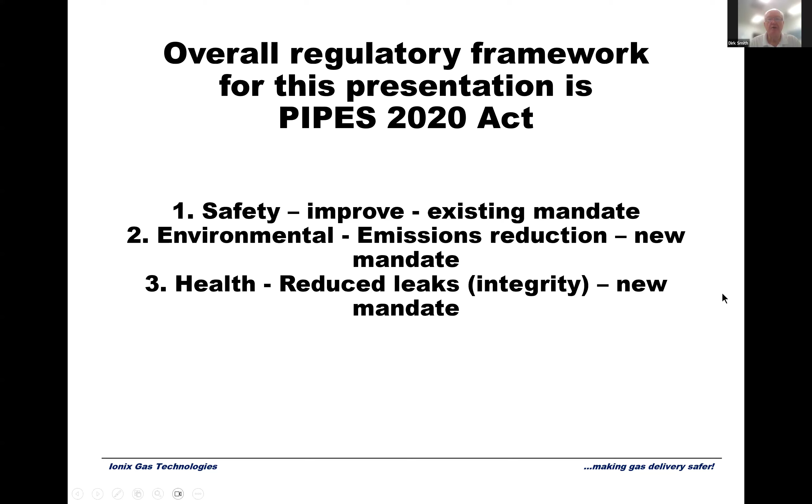It's important we keep in mind the regulatory framework of this presentation, that's the Pipes Act 2020. The LDAR rule was withdrawn from the Federal Register on January 20th after the inauguration of Donald Trump. However, that does not negate the Federal Pipes Act. In addition to improving safety, which is an existing mandate that PHMSA, the enforcement agency, has, it also said they must take into account environmental effects and health effects of methane emissions. That's going to be the basis of what we're going to be talking about, the overall framework.

The goal of this session is to gain a working understanding of static electricity in your PE gas pipe system. We're also going to do a digression about metal pipe. Then we're going to learn to recognize the four static threats that come about due to static electricity in your distribution systems. We're going to review available static suppression technologies, and we're going to suggest best practices for that.

Now it's important we all have the same understanding of the terminology. First, understand what static electricity is. Electricity is electricity. The difference between static and current electricity, like the electricity powering this laptop, is that current electricity flows through a material that is an electrical conductor, like copper, which easily allows the flow of electrons through it. However, if you took those same electrons and put them on a piece of polyethylene, they would not move. They'd be static, because the inherent nature of polyethylene pipe will not allow the movement of electrons on it. Therefore, you have to conduct the electricity away, because the material itself will not conduct it away.

So how is static electricity created? Generally it can be created many ways, but in our case it's due to friction, the passage of gas inside the pipe, the mechanical shearing action of gas passing through the pipe. When it does so, it physically scrapes off electrons, and these displaced electrons accumulate in random places inside your system. We don't know why they go to one place rather than another, why they're not evenly distributed. It just does. So the static starts to build up, and these orphaned electrons accumulate inside the pipe in certain areas.

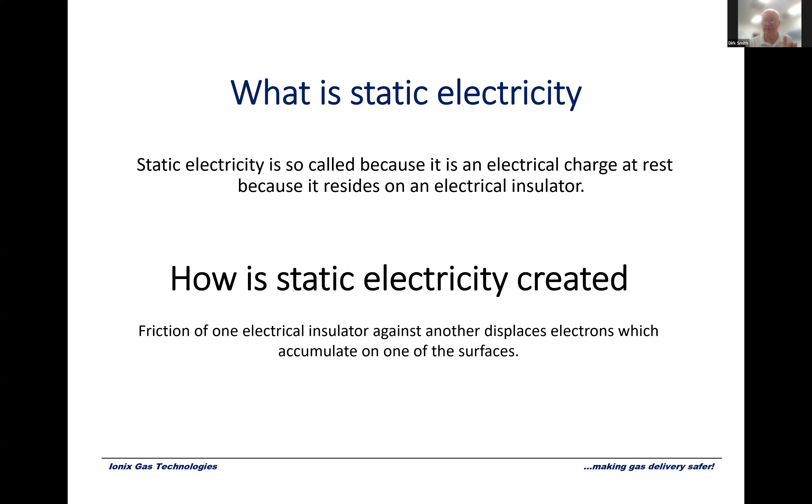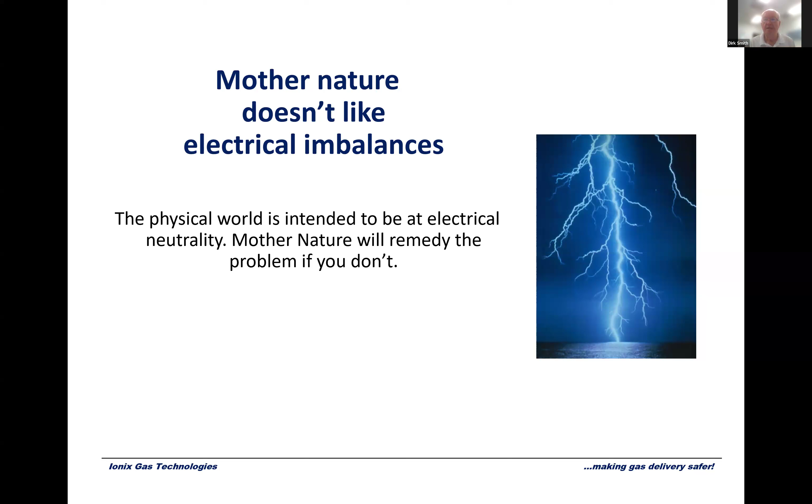Now, four basics of static electricity and polyethylene pipe. This was research done by the Gas Research Institute, paid for by the industry. And this is the most important thing you need to take away today. If you have a priority of everything I wanted you to learn today, this would be number one. The root cause of all your static issues is because static starts inside the pipe. It's the movement of gas, it's the friction in there. That's the engine, that's what's making the static.

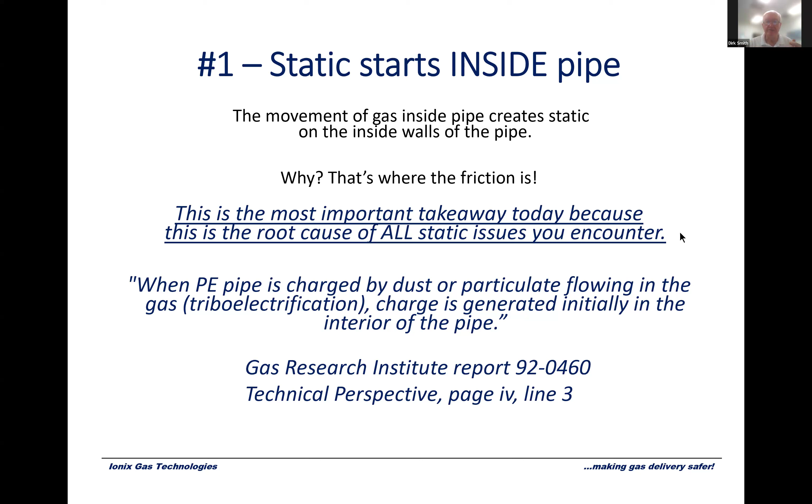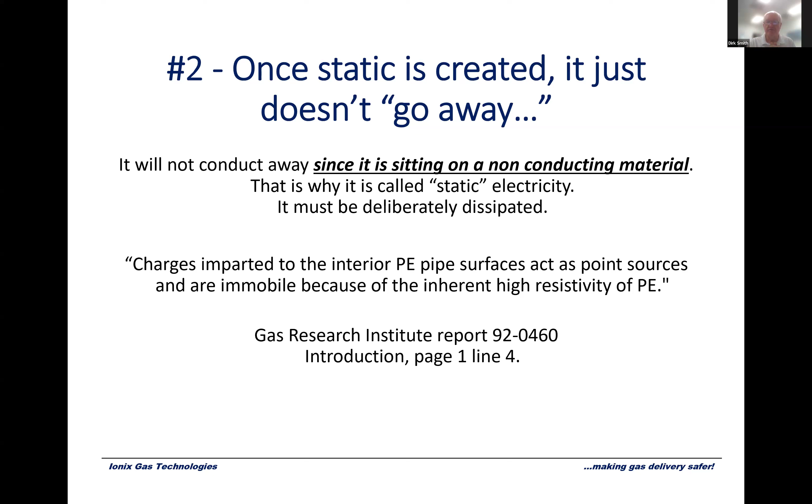Understand it will flow out, it'll manifest itself in different ways, but it all starts here. And here's a citation from the Gas Research Institute on what they found. The second thing is that because those electrons are sitting on a material that is not an electrical conductor, that is polyethylene, those charges just sit there. They can't conduct away, they're just going to sit there until something causes them to go away. And there's a citation from the Gas Research Institute.

Now the third thing is not intuitively obvious. I could explain it, but it would take too much time. You really don't have to understand why it happens, you just need to know it does happen. And that is, when the static charge is built up on the inside of the pipe, it induces a charge on the outside of the pipe. That's why you do the static discharge procedure on the outside of your pipe.

And the fourth thing is that static's going to discharge. If these charges accumulate, they will by nature seek to dissipate themselves, to neutralize themselves by arcing to ground. So it's important that you understand that problem is just not going to go away.

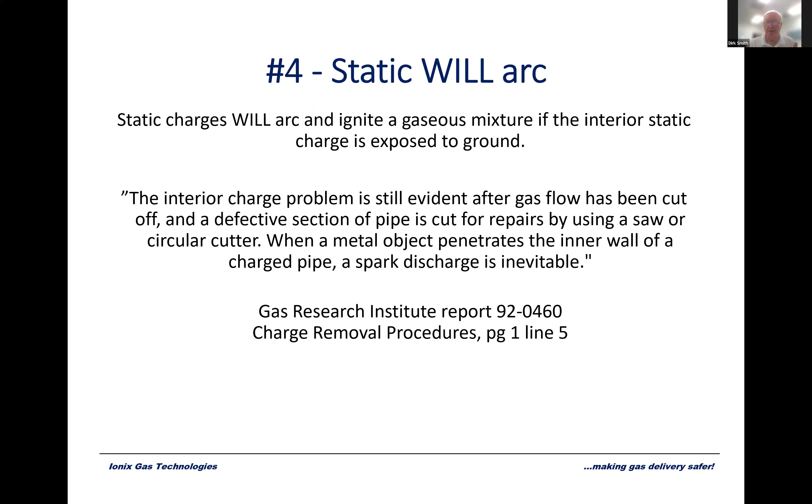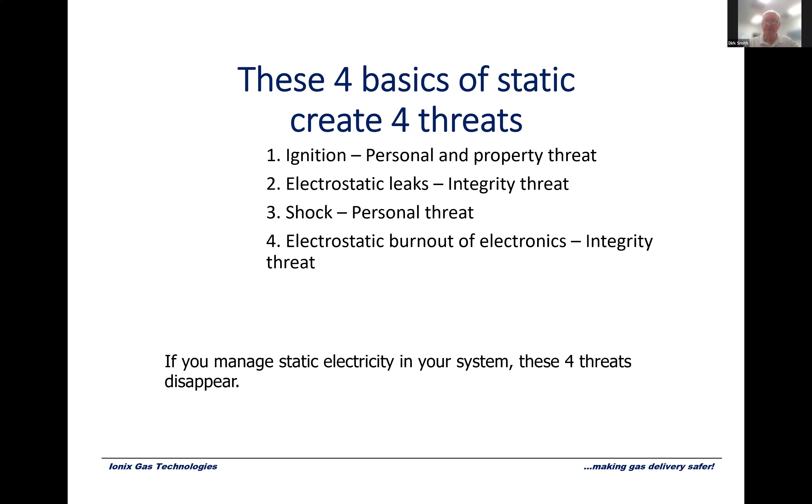Now, from these four basics flow four threats. Ignition, which is a personal injury and a property threat. Electrostatic leaks, it's an integrity issue. Static puts holes in pipe, it shocks people, and it burns out electronics, and that's an integrity issue. If you manage the static in your system, all these problems go away.

Now, this is a bulletin issued by OSHA about static electricity and buildup in pipe. It was issued, I think, around 1980. It was directed to make sure that everybody is aware, that OSHA is aware, that static builds up in polyethylene pipe, because they had an incident of ignition in Dallas, Texas.

In 1973, in the AGA plastic pipe material book, it advised operators to do static suppression before working on polyethylene pipe. Now, the reason I bring these two up to you is I got a call one time from a gas company, fairly large one, and they said, please don't send us anything more about static electricity in systems, we don't want to know about it. And I'll tell you, I was stunned.

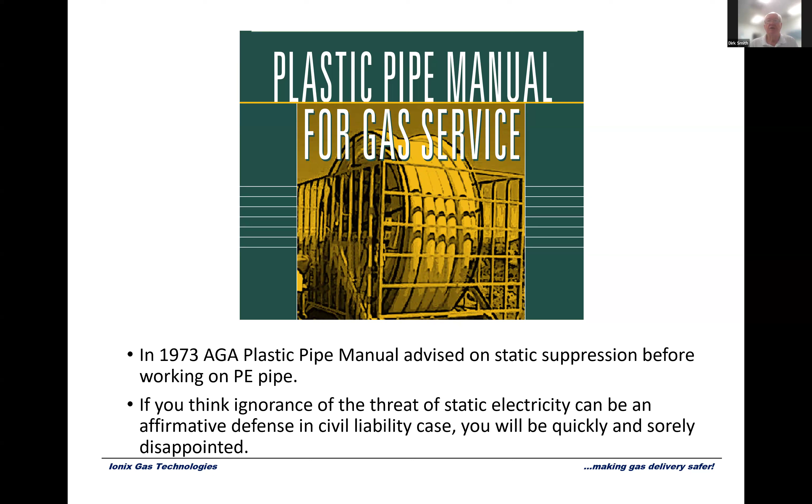Basically, they were saying, if we don't know, if we're ignorant of the problem, then we won't be liable. But the plastic pipe manual, OSHA has said there's a problem, AGA says there's a problem. If you think declaring ignorance as an affirmative defense in a civil liability case will work, not only will that be dismissed post haste, but you'd even be accused of negligence by not knowing some of the basics that everybody else in the industry is aware of. So you can't put your head in the sand about this issue. It will come back to bite you if you do that.

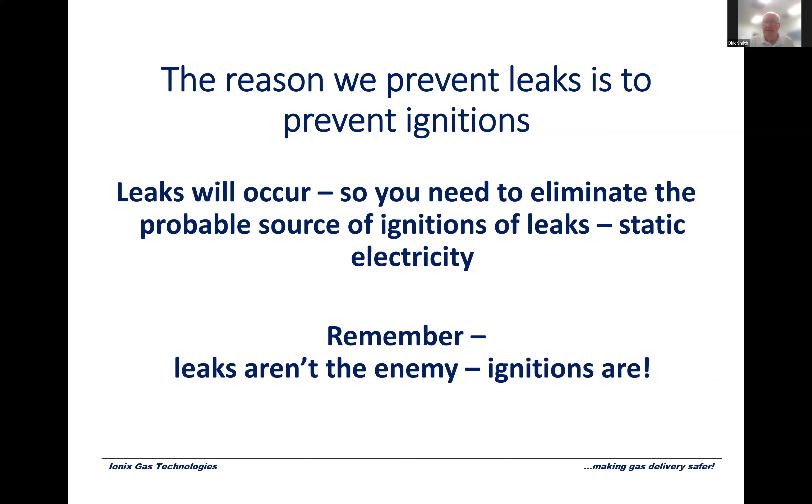Okay, of the four threats, we're going to talk about the first one, and that is the ignitions of leaking gas. Now, why do we prevent leaks? Everybody wants leak detection, everybody wants to make sure we don't have any leaks. PHMSA wants no leaks. What's the reason they don't want leaks? The reason they don't want leaks is because the leaks ignite, and your main source, your probable source of ignitions of leaks, is static electricity. So remember, your leaks aren't the enemy, ignitions are. If you find and deal with the primary ignition source of leaks, leaks don't become nearly as threatening as they used to be.

This is a pie chart of the claims expense paid by the Associated Electric and Gas Insurance Services, or AEGIS. AEGIS insures probably 90% of the gas companies in the United States, in addition to insuring the electric.

And this is a pie chart of the claims. I think it was 2023, this was given to me. And this shows where all the money was paid for claims by category by AEGIS in the year 2023.

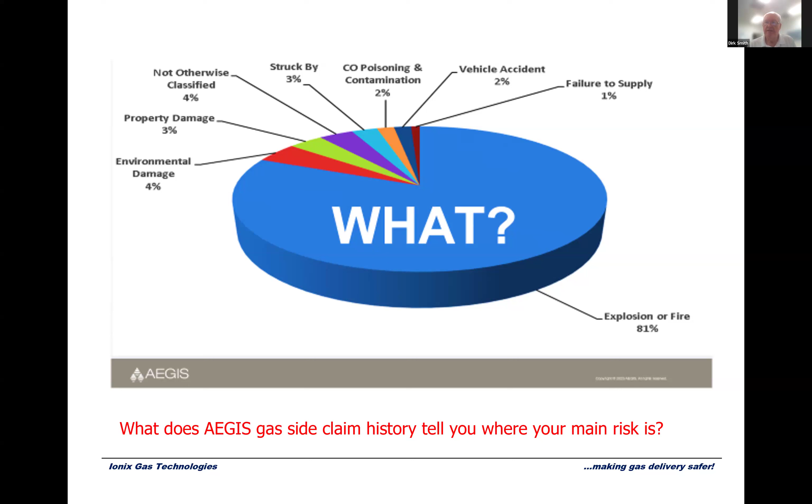If you take a look at it, they've got environmental damage, property damage, other not otherwise classed, struck, CO poisoning, accident, failure to supply. But all those other categories combined do not equal what they paid out in fires and explosions. It pays to prevent ignitions.

This is a video that was sent to me. It was a recording of a TV station's evening news when it was broadcast. It's been about 25 years now. It was recorded using a VCR over the television, that's how long ago it was. But it's one of those rare instances where an ignition is caught on tape.

What happens is the television station listens to the police radio. They heard there was a leaking gas line. They send a crew out to film it, and they listen to the police radio, and they just send people out, and they don't know. They collect it all up at the end of the day and decide what they're going to air. And this is what they aired on that day.

A natural gas explosion rocked an Oklahoma City neighborhood just before noon today. Workers were trying to repair a ruptured line at Northwest 131st and MacArthur when the gas ignited. Newsline 9's Heidi Browning joins us live from that neighborhood. Heidi? Well, Kelly, there's a bit of a mess out here in the neighborhood. You can see behind me what's left of a fence, charred remnants of the posts, and quite a lot of digging that's been done to make repairs to those lines. But people coming home this evening will find a much calmer scene than what many people saw this morning. It started as a fairly routine repair job. ONG workers were trying to get the gas turned off after a 2-inch medium pressure line was accidentally cut. Suddenly, the gas exploded, sending huge flames into the air. 2 workers received minor burns. ONG officials say there's preliminary speculation that static electricity in the plastic pipe somehow caused the explosion. It took about 30 minutes to control the fire and get the gas turned off.

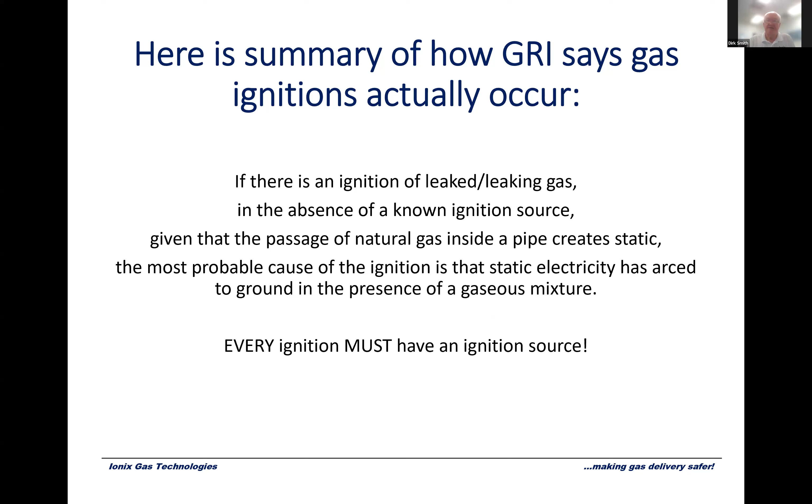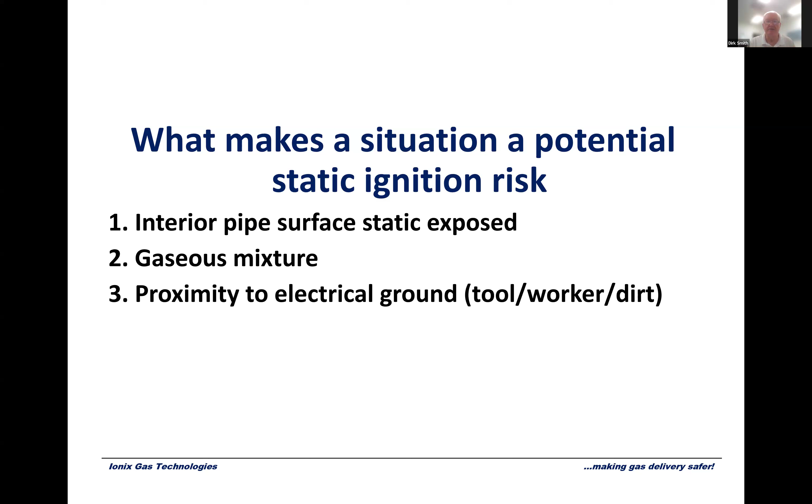In this, we're going to look at some of these field operations and what makes them dangerous specifically, because I want you to see where the danger is in these operations. You're going to know that these operations are dangerous, but where's the static in these operations that causes it to be dangerous? That's what I want you to understand. So remember, in any situation with a potential static ignition risk, you have to have interior surface static exposed, gaseous mixture, and proximity to ground, electrical ground.

So here are the 5 most dangerous operations. And when your crew goes out in the morning, like this crew does, I want you to be ready and explain to them what these dangerous operations are. Remember, there's going to be static that starts on the interior of the pipe and works its way out - the root cause is in the interior. Now, this is the most dangerous one, and this is what you saw in the ONG video I showed you: there was third-party damage.

Now, what happens is we know static is generated inside the pipe, but it's not uniform. I can tell you with 100% certainty there's static in your system. Some people may have more static than others, and it's not evenly distributed.

Now, in this illustration here, you see these red patches. They indicate hotspots of static that randomly appear. Here's this dig in on this pipe, kind of what you see in that ONG video. As the gas comes flowing out, the broken edges create a lot of turbulence, and the static builds up on the inside edges of the pipe.

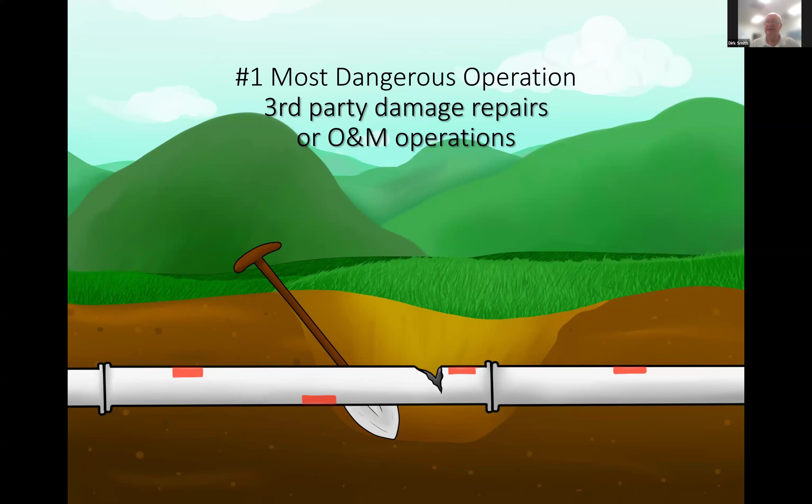The reason this pipe didn't ignite right away is because it didn't hit a hot spot. But with the gas blowing out of the pipe over time, the static built up and up and up. It kept growing, finally got high enough to arc to ground in the presence of the gaseous mixture, and that's what ignited it on camera.

Now, it's the same thing if you have a purge pipe. We're purging less and less, I get it, but you're going to have the same thing, and the static is on the inside edges as the gas flows out. This is the same if you have an overpressure vent or a relief vent. The same thing's going to happen.

Now, this is a metal purge pipe, and you have it grounded. You're assuming there's a connection to ground, but you can't assume that. You have no way of knowing. If you have coatings or grease buildup, static can build up on those electrically isolated patches. So you should always look to dissipate the static on the inside edge of that purge pipe, and the connection inside -- it's not going to be a smooth, clean connection between your metal purge pipe and the plastic pipe.

Be careful when you remove the metal purge pipe. The connection there will have static on the inside edges also.

The third most dangerous is cutting into a squeezed off plastic pipe. What happens is, downstream from a squeeze off, when you start the squeeze off process, the gas starts to accelerate to get through the narrowed opening. It's called the Venturi effect, well documented. The increased velocity creates increased friction downstream, which causes increased static electric charges, very high charges. So you have to be extremely careful when you cut into this pipe downstream.

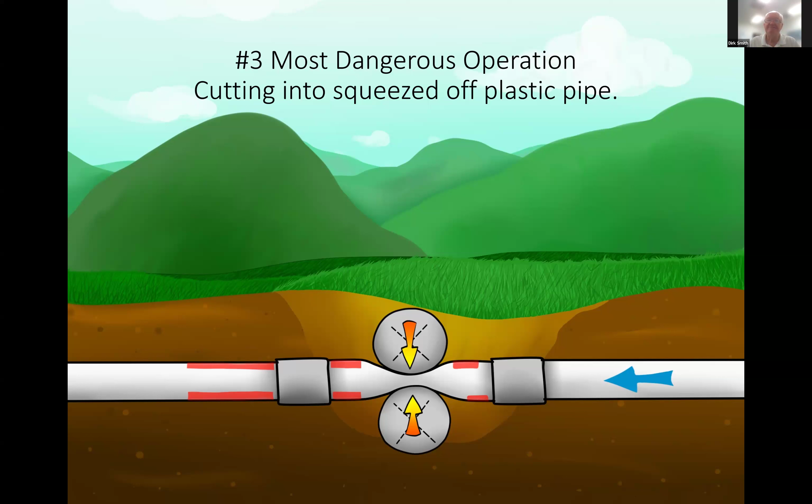So whenever you have a decrease or increase in the diameter of the pipe, whether it's a squeeze off or a valve, be very careful cutting into it downstream.

Well, when you have a topical anti-stat, you just spray it in there. Once you fuse the tap, you spray it in there, and that anti-stat works down there to dissipate any charge. But when you have a hot tap, you've got to be careful -- you don't know if you're drilling into a hot spot or not.

And finally, whenever you cut into a pipe that's been previously under pressure, removed from service, cut in or opened, or you're reaching into it, you have to be aware that it could be a static hotspot inside there. I remember a Western operator telling me a story about how they had a main line and a stub line coming off it.

They were going to extend the stub line, so they shut the main line down, took it out of service. The crew went over there, took a saw, started to cut through the plastic pipe, and boom -- both of them were thrown out of the excavation and taken to the emergency room. Big bang. Well, it wasn't an explosion, it was an electrical shock.

So the utility was embarrassed. They hadn't called for a locate, even though they tell everybody to call it. They didn't call for a locate. So they called the gas company, and the gas company says, we don't have any lines out there. And what had happened, they cut into a hotspot on that stub line.

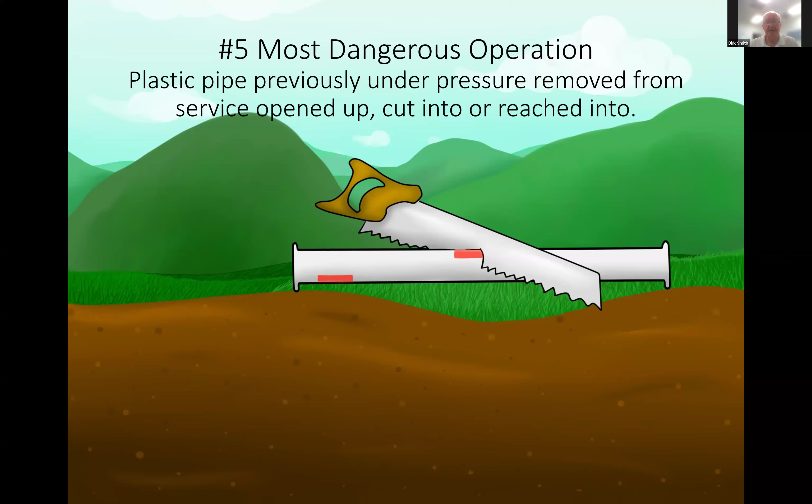This is an incident we're going to talk about now, and this is time we have an adult conversation.

This occurred on November 26, 2014, Memphis Light Gas and Water. And the OSHA report reads as follows: at 10:30 a.m. on November 26, 2014, 5 employees were caught in an explosion due to a natural gas leak. Static electricity ignited the gas leak, and 1 employee was killed and 4 others were burned.

Now, first of all, we're going to look at this a little bit further, but I want you to understand that OSHA did not find Memphis Light Gas and Water at fault. They had procedures, they had training in place that was designed to prevent this. So it's important that you have these procedures and do training on this, you audit it, make sure it's followed, and you will then have an affirmative defense if something goes wrong.

This is a video grab of that ignition. Now, I'm going to tell you what I have anecdotally heard. This is being recorded, it's going to be on the internet. I have not verified this. So it has been alleged that the workers in the trench had squeezed off the poly pipe and cut the pipe.

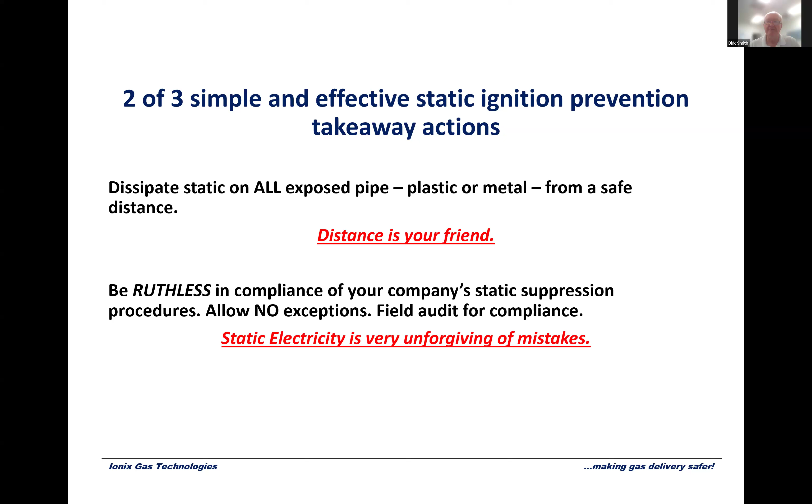2 of 3 simple and effective static ignition prevention takeaways right now. Dissipate static on all exposed pipe, plastic or metal, from a safe distance. Distance is your friend. Be ruthless in compliance of your company's static suppression procedures. Managers and workers, don't allow any exception, and field audit for compliance. Static electricity is very unforgiving of mistakes.

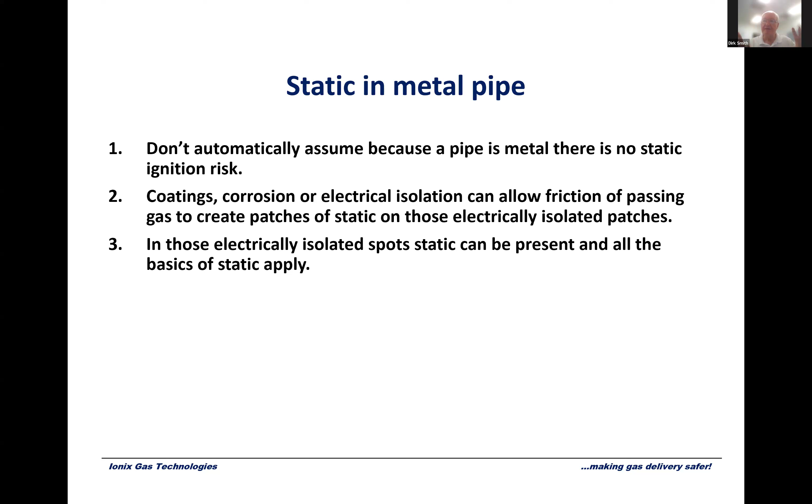Now, we're going to talk about static in metal pipe for a minute, because we're primarily talking about poly, since static and poly pipe is a far greater problem by the nature of polyethylene. But people think that you can't have static on metal pipe, and that is not true. The reason is because if there's any coatings—and everything's coated—or there's oil or grease, electrical insulating materials, or some kind of debris, that same friction that shears off electrons can deposit and accumulate those sheared off electrons on surfaces that are electrically isolated, and they can build up. So you need to be aware that you can have static on metal pipe simply because of all the coatings and all the stuff that's inside the pipe downstream.

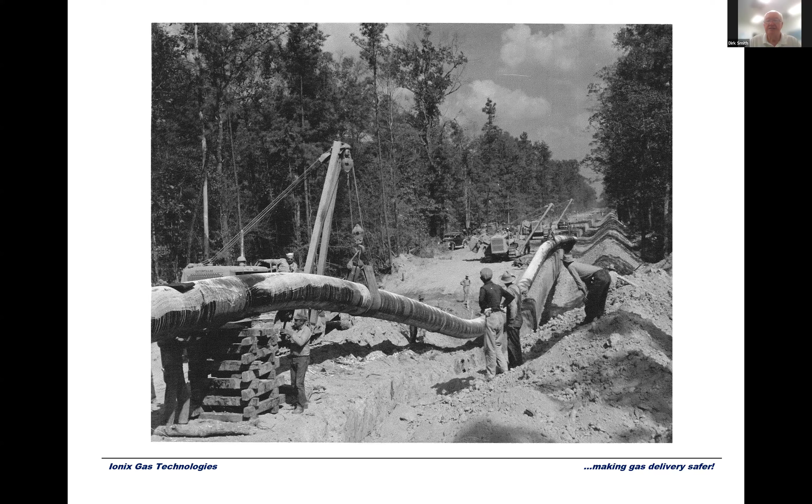Now, we're going to talk about a nice modern pipeline like this one you're seeing installed right here. And that is this Tennessee gas pipeline in Hanoverton, Ohio, on February 10, 2011.

It's a metal pipe, right? Static can't be generated. Oh, yes it can. It doesn't mean that every natural gas metal pipeline or every poly pipeline that leaks is going to ignite. However, it has the potential to do that. You must understand that. What's happened here is this pipe has failed.

The friction of the gas going out the break—it's coated. The static starts to build up on the coated areas. It gets higher and higher the longer this gas flows out. It finally gets high enough to arc to ground and ignites a gaseous mixture, and you have the picture that we have.

Now, one more thing about metal pipe. OSHA has reported 2 fatalities from explosions during the launching and retrieving of pigs.

Downstream guys, you're not doing this too much, but upstream, they pig the lines every day. If you are doing that, you must be aware that when you have a launcher or retriever, you have the three ingredients for an ignition: gaseous mixture, exposure to ground, and personnel nearby.

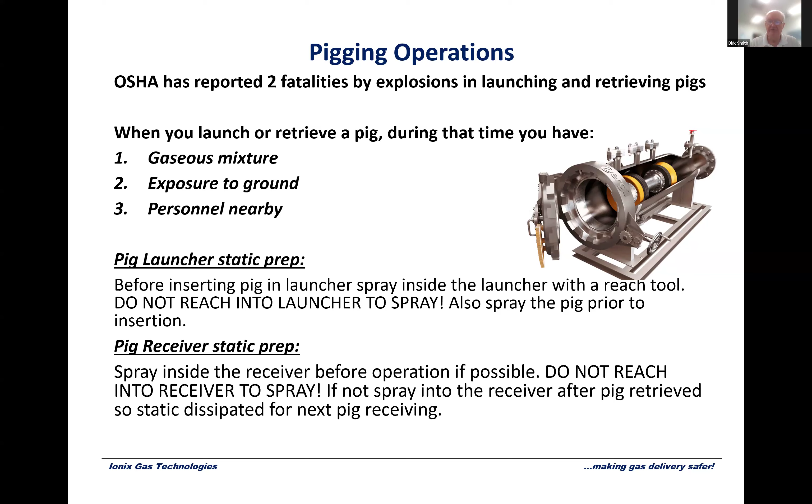Whenever you get ready to launch or retrieve a pig, you ought to spray an anti-stat inside the launcher or retriever before you begin the operation, so that when the pig goes in, the static is dissipated. When you open it up, the static has been dissipated, and when you retrieve it and open it up, same thing. You have made an effort to dissipate the static charge.

Now we're going to talk about the integrity issue that static causes in polyethylene systems, and that's it creates electrostatic pinhole leaks. Now we're all concerned about good technology for leaks, so I'm going to show you the newest advancement in LDAR technology for your consideration.

What happens is workers go out and see these little fizzy leaks. They get a leak call at a house with a poly service, go out there, see brown grass, dig it up, and see just a little fizzy leak. And they'll say it's just bad pipe, just a random thing. No, no.

It has been shown in the last 20 years that these leaks are caused by static electricity. They will be in one of two places: you'll find them running in the flat areas of the pipe where it's arced through the pipe wall, or you'll see it arc through a bead.

In a fusion bead, if you have one in a service line—chances are you don't, but if you might—the bead protrudes inside the pipe. The force of the gas hits that bead, the friction is higher, it builds up a charge, and arcs through the bead. You might get a leak there.

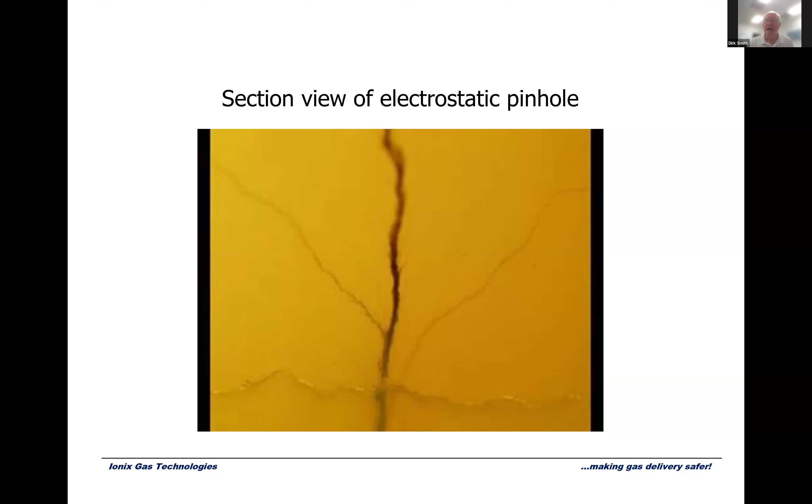They were straight lines, you know, there weren't any filigreed stuff like this. This is showing you that it is an electrostatic discharge that's causing these holes, not a manufacturing defect.

Now, GRI says that these holes can be created in the normal transport of gas. We don't know why certain areas have a problem. I can tell you there is a problem in Illinois, Indiana, Kentucky, Ohio, Western Pennsylvania, West Virginia, Virginia. Why there and not in other places? I don't know if it's because people haven't recognized what causes these holes. They're small holes, so they just don't bother with them.

But if you have a pinhole leak in your system, that demonstrates you have static electricity in your system. If you have a half-inch MD poly pipe service line, because of the dielectric constant of polyethylene, I can tell you exactly what voltage is necessary to arc through that pipe wall. It's about 42,000 volts. So if you have a half-inch poly line and a pinhole leak in that line, you had 42,000 volts of static inside that pipe that discharged to the wall of the pipe.

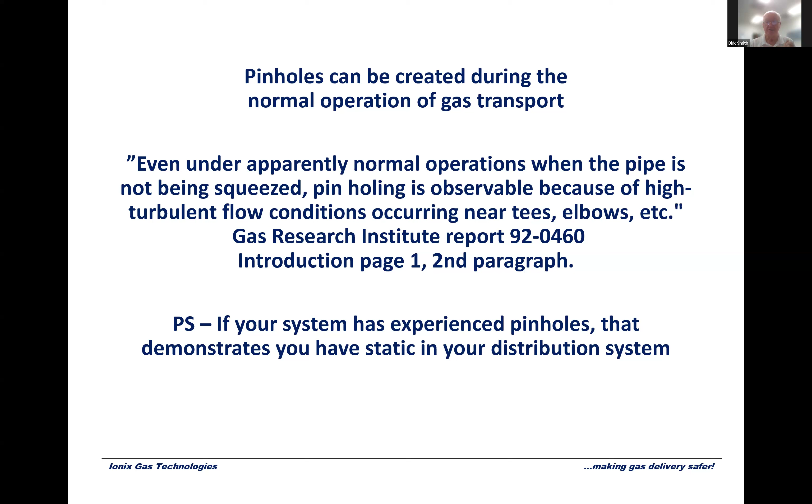Of course, the easiest way you find them is all of a sudden you get a leak call at the house. I smell gas. You go out there, and all of a sudden you see these little dots of brown grass going up to the meter. It's a poly line. It's an electrostatic pinhole leak.

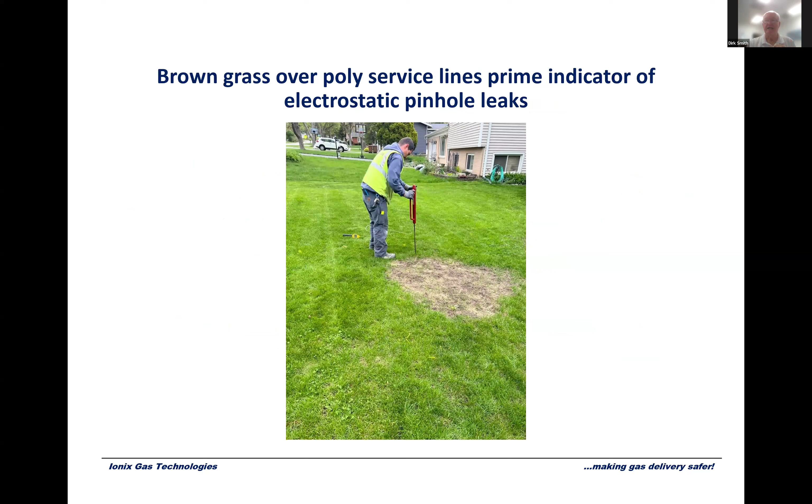So pinholes always occur first in service lines because they're the smallest diameter pipe wall. Therefore, it takes the lowest amount of voltage to arc through it.

However, I'll tell you a true story. Up in the upstream market, it's just the reverse of what you guys do in the downstream market. In the downstream market, you take gas at 8 inches, reduce it down, distribute it to 4 inches, then do whatever you want. But you go from a big pipe down to a little one. In the upstream gas production and gathering market, it's exactly the opposite. They gather at wells at 6-inch lines, and they start to accumulate it until they take it to the gas processing plant. I got a call from a gatherer, and he had a 20-inch poly line, a gathering line, and he had a pinhole leak in it.

One, imagine the cost to fix that. But two, can you imagine how thick the wall of that pipe was and what the voltage had to be to put a hole in a 20-inch poly line?

So you're going to find these pinhole leaks are going to show up with leak calls in residences, with grass in your service lines. You're going to find multiples. It's rare that there's only one. If you got one, you got more than one. And the problem is, if they get close together, this gas pools to an unsafe concentration. And under 192.1007, this is a known DIMP risk, and you're required to address and mitigate this.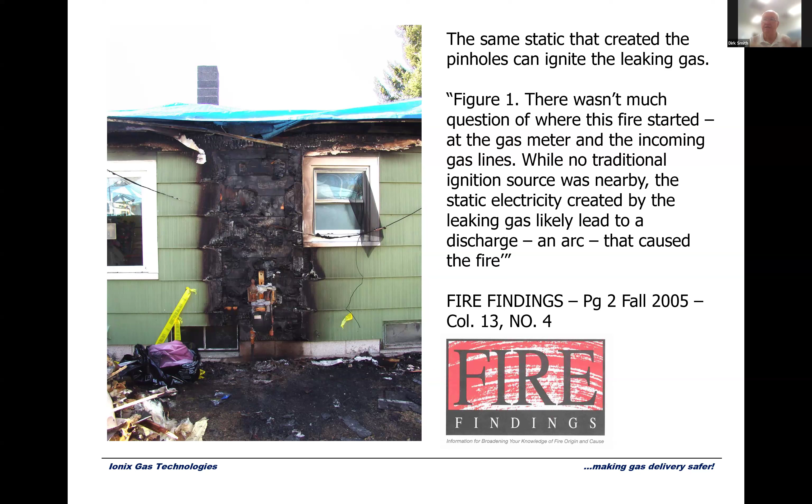You got to have an ignition source. Where's it coming from? That's why when you get these pinholes at your service lines, this is the possibility you can have. My first customer, when we originally started our system to get rid of these pinhole leaks, our first customer called us specifically for this reason. He was getting pinhole leaks of service, and he said, I'm going to burn somebody's house down. I can't do this.

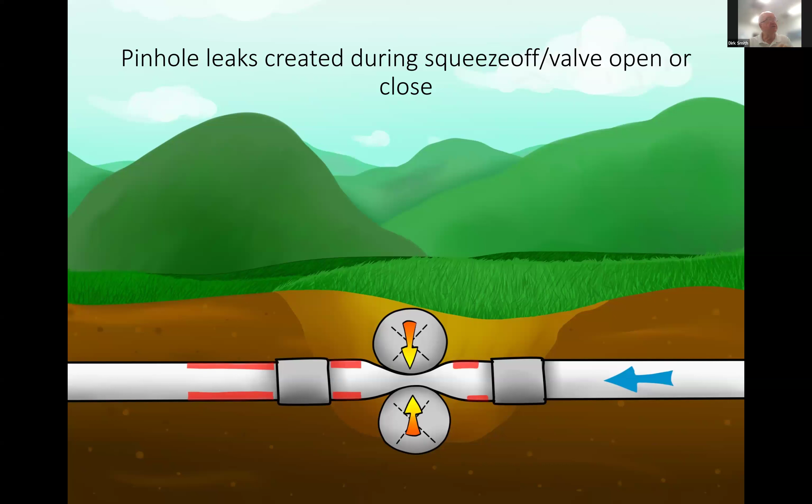Now, also, you can get pinhole leaks downstream after squeeze off, and you can also get it downstream from poly valve opening and closing. So it's important to keep that in mind. Whenever you open and close a valve, whenever you do squeeze off, you need to soap those downstream pipes to make sure that you haven't created a leak.

Again, you have to be concerned when you have a squeeze off valve opened or closed, the same thing can happen. I have not heard of any reported fatalities from this, but a friend of mine, Steve Jocelyn, who was with Connecticut Natural for many years and is now with PAL Controls, told me when he was in Connecticut they had a guy where the static charge arced from the pipe to him, went through him and exited out his foot. They had to use a defibrillator on his heart, and he also lost his big toe, burned by the static electric charge exiting his big toe. So although there's no fatalities, you've got to take this serious.

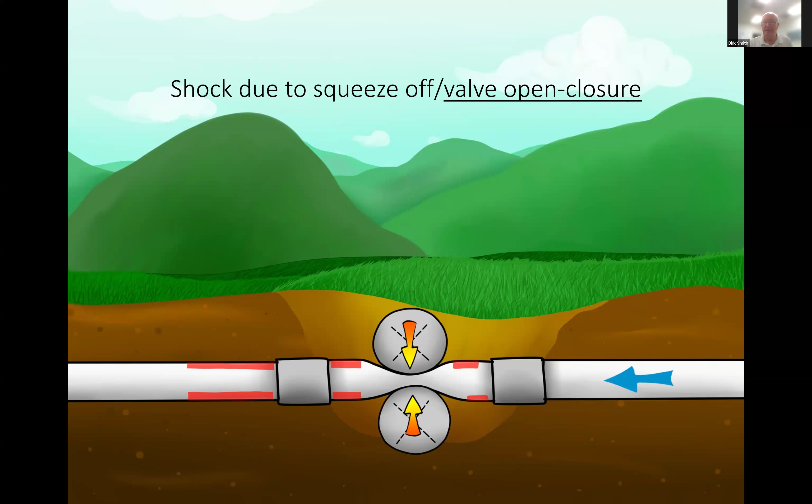It can happen, just like when those guys cut through that pipe and hit a hot charge in a hot spot inside that stub line, and off they went to the emergency room.

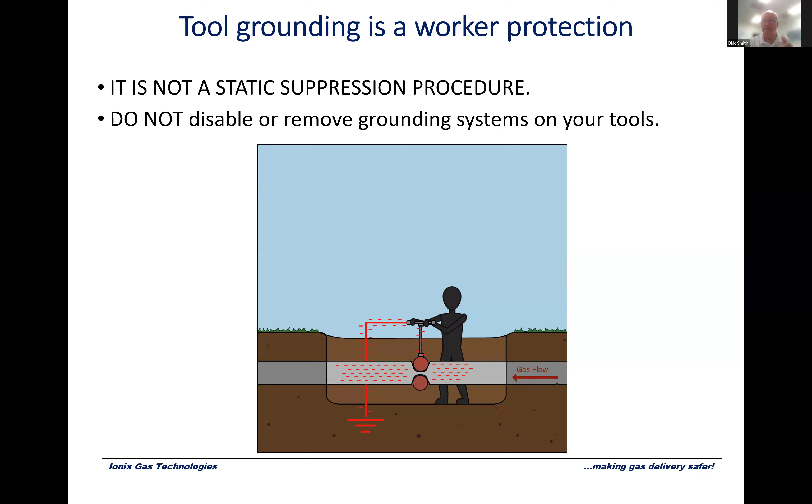Now, this is why tool grounding is important, but you must remember it is designed to protect the worker from getting shocked. It does nothing to dissipate the static charge on the pipe. Remember, the poly pipe is non-conductive, so if you ground that tool, only the charge that's in contact with the tool gets grounded. Grounding the tool does not get rid of the static on the outside of the pipe in the surrounding area. It's important for you to remember that. It's important to ground the tool, but also important to remember it doesn't dissipate static on the pipe. And again, remember when cutting into a pipe to be aware you could hit a hot spot and get a shock.

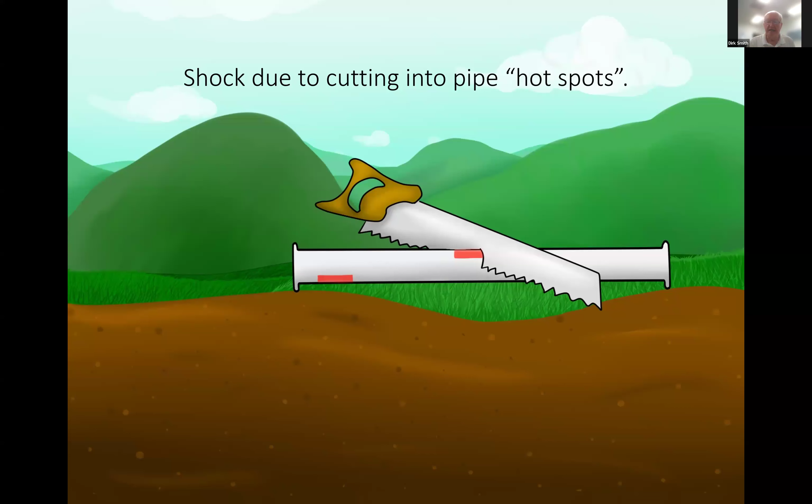Also, when you have high velocity gas passage, like in purging. Real quickly, I want to mention one more thing we've seen. It's something you probably will not come into contact with, but in case you do, now you'll know and be able to recognize it. Static electric charges can arc and burn out the low voltage electronics hanging on your system, whether it be a meter, SCADA devices, anything like that.

I got a call a while back from the Kansas Corporation Commission. They regulate and are in charge of pipeline safety in Kansas, and this is what happened. They needed to locate a line for repair, so they hooked up the locating transmitter. They found the location, dug it out, squeezed off the line, and all of a sudden the locating transmitter burned up. They said, well, we think it was the batteries in the locating transmitter that caused it to burn up.

Those are 6-volt batteries. They're not going to burn anything up, that's the reason they use low-volt batteries. What happened? Here's what I think is the most logical explanation. They squeezed off the pipe. There was a static buildup inside that squeezed off pipe downstream. It arced to the tracer wire, back up the tracer wire, and into the 6-volt locating transmitter, and fried it.

So if you're finding areas where meters seem to get burned out, or some kind of electronic equipment gets burned out and there's no recorded lightning strikes, it's probably static electricity in your system. Okay, now we're going to talk about mitigation technologies.

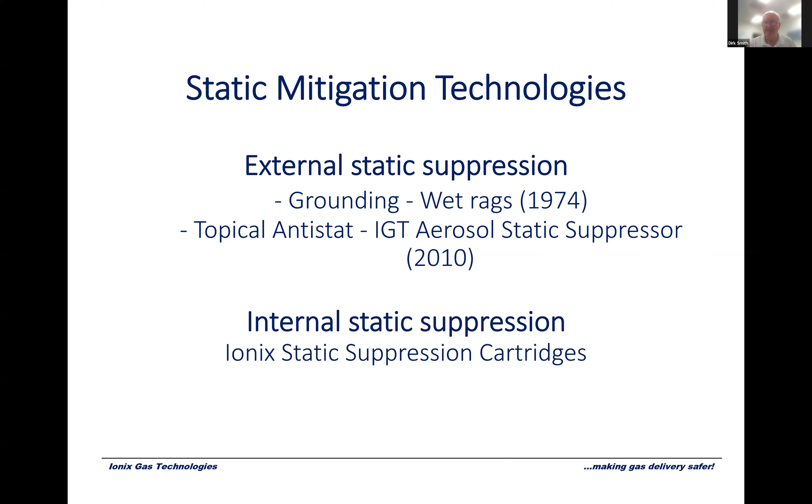Now, external static suppression is strictly a grounding mechanism. That's all it does. You wrap it up and you sit there and you keep it wet. The water, the soapy water and the pollutants in it, when you put it on the pipe, whatever area that rag touches, hopefully the charge is conducted through the water the rag is holding and conducts it down to ground, as long as there is a good ground.

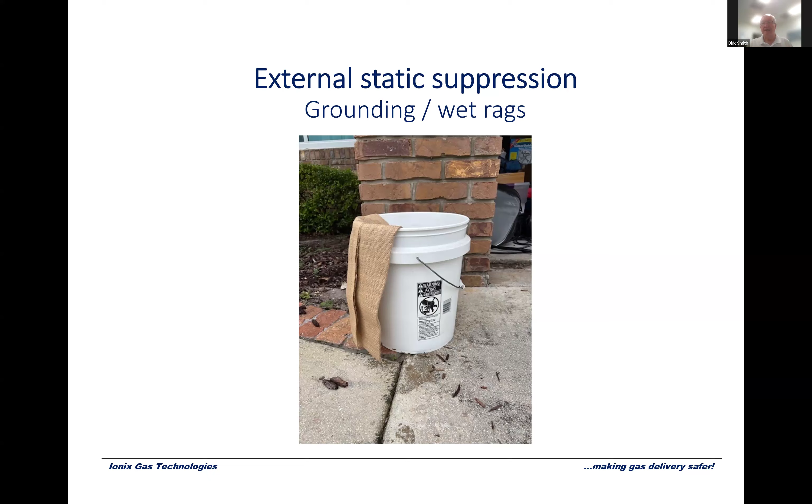Now, the problem with this technology is, one, the purpose of static elimination is to make sure an ignition doesn't occur when a worker's nearby. Yet with soapy rags, you have to send that guy down into the excavation before you've dissipated the static in order to dissipate the static. You don't want to do that.

The second thing is you can't confirm that you've got a good electrical connection that's grounding the charge. You assume it is, you assume it's wet enough, you assume everything, but you don't know, you can't confirm it. The third thing, it's not suitable for a lot of operations, like hot tap. Burlap bags, you can't put them down in a hot tap. And then finally, it's only as effective as it's properly applied and kept wet.

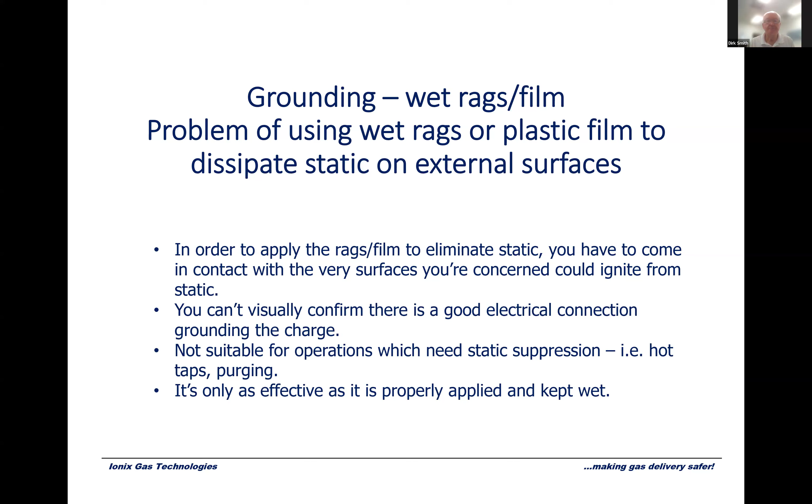Topical anti-stat, what happens is it dissipates static immediately on contact with any surface. It could be a tool, anything. It's easy for field guys to do. I mean, think about it. It uses far less labor.

Just imagine with me, just do a thought experiment. You've got a 6-foot section of pipe you've excavated, okay? He goes to the truck, he gets his bucket with his burlap, he goes down the trench, he starts to wrap the pipe. He takes the pipe out, starts to wrap it around. He pulls it around, reaches under there and pulls around, reach around and pull around. And he does that all this 6 feet, say, okay? And he stakes it and then he gets it wet, okay?

Now, that guy's getting paid, what, 35 an hour, burden rate probably 125 with benefits and all that, okay? So that guy probably spent 15, 20 minutes of labor putting on free burlap. Okay, you take that same 6 foot, you take a can, topical anti-stat, and you turn the can upside down, on the bottom, and in about 30 seconds, you're done. So you've saved about 14 minutes of labor.

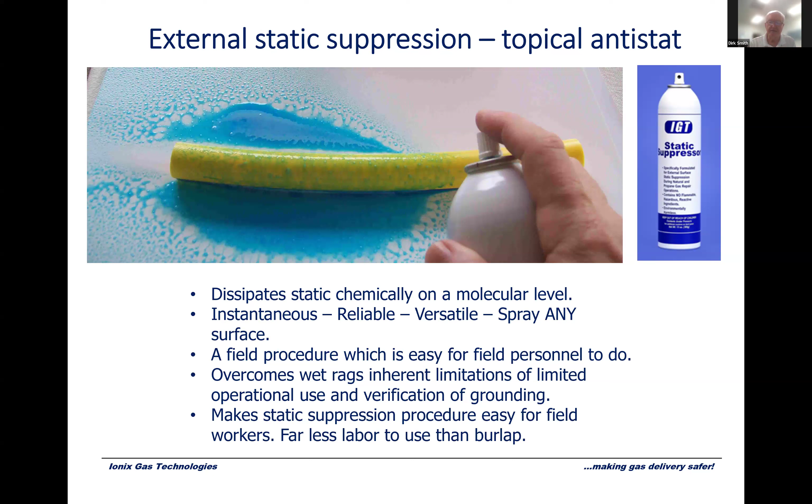So topical anti-stat, even when it dries down, continues to dissipate the charge. You don't have to keep it wet. You don't have to watch it and monitor it. It works automatically, and it's suitable for any kind of operation. Hot taps, purge pipes, you can use it anywhere.

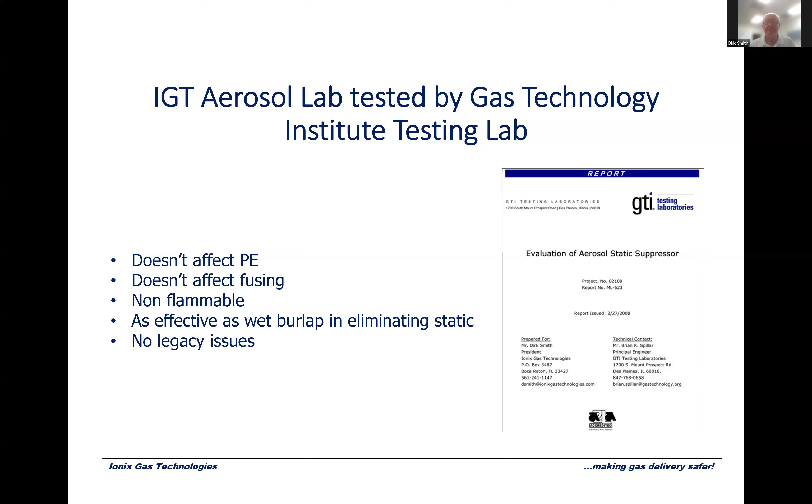Our aerosol was tested by the Gas Technology Institute to make sure it doesn't affect PE. It doesn't affect fusing. It's non-flammable. There are some commercial consumer anti-stats on the market. Do not buy them. Okay, repeat, I said, do not buy them. And the reason is the gas they use to push out the anti-stat is propane. We do not use propane. We use nitrogen. Our aerosol is really essentially a fire extinguisher. It pushes away the oxygen when you spray it near that surface. GTI said it's as effective as wet burlap, and there's no legacy issues.

So the third and final simple and effective static ignition prevention action: ditch the burlap, get rid of the burlap. It's 50-year-old technology. It's expensive and labor intensive for you to use. That's why we have new technology.

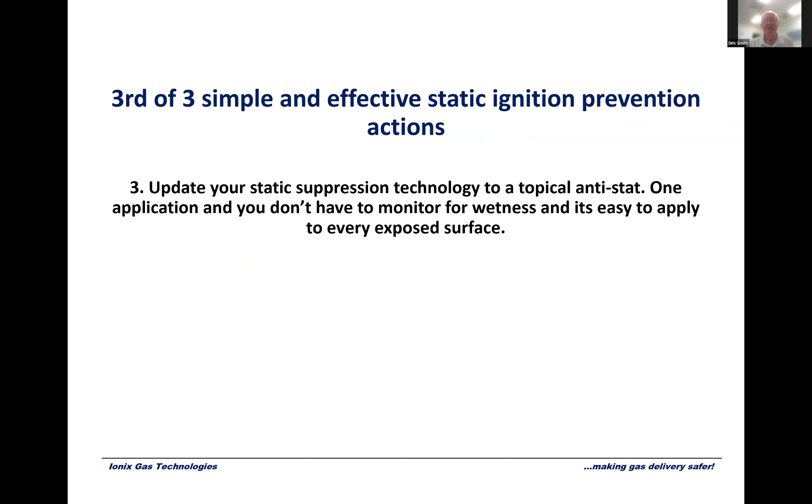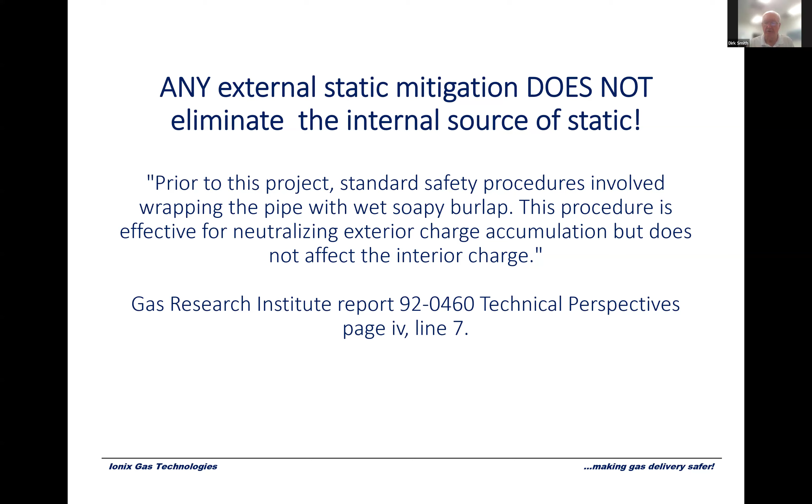Now, remember, we've been talking about external dissipation, static dissipation. Burlap or our aerosol does not get rid of the static on the inside of the system. It can't penetrate the poly to get inside there. So it's important you understand, don't get into a false sense of security by saying, well, I have no risk at all because I've dissipated the exterior static. You must dissipate the exterior static just as a safety measure, but it is not 100% foolproof. Interior static suppression solves that problem.

Now we have a system that dissipates static. It's been out 12 years now, and it dissipates static. Gas passes through our cartridge, which is housed like you see that housing on the right, that's at a gate station. Gas comes in from transmission, runs through our cartridge, goes on to distribution. When it passes through our cartridge, there's no liquids or anything. It suppresses the static in the system from the time it goes through our cartridge to burner tip.

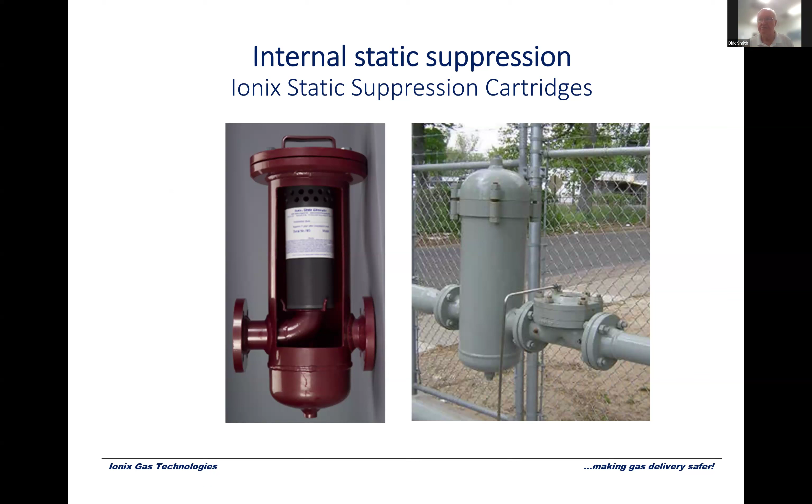My oldest customer was having pinhole problems. He has no pinhole problems anymore. He has about 8,000 services, 350 miles, and he has 2 cartridges, that's it. It treats the whole system, and it works out to be about 50 cents a service a year.

But the main reason people put it in now is to stop the leak calls and repair costs on poly service lines caused by pinhole leaks. So really you can kind of consider this cathodic protection for polypipe, but it has a secondary benefit. It's static that's putting holes in your pipe, but it's static that ignites those blowing lines. So you have the secondary benefit: in addition to stopping pinhole leak creation, you greatly reduce the risk of internal static igniting blowing gas, leaking gas.

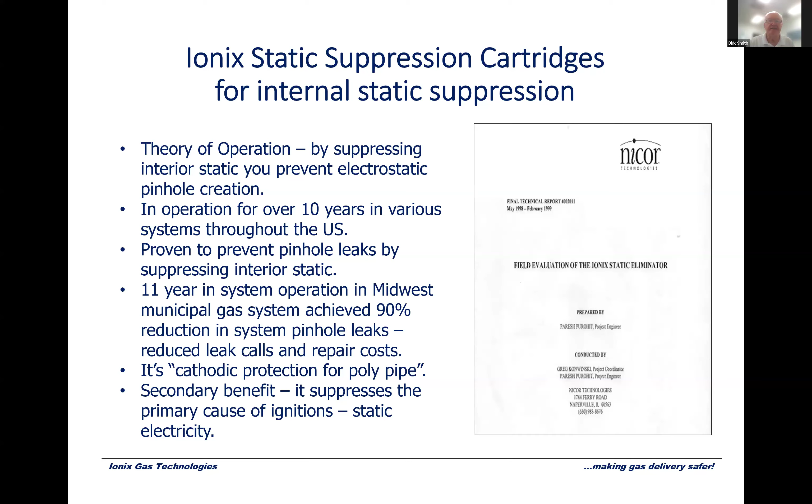So here's your crew, they're ready to go out Monday morning. So what I'm going to do is just wrap this up and give you a review of the O&M best practices. First, spray all exposed pipe, poly or metal. If you've got third-party damaged pipe blowing, spray, that's one of the most dangerous situations you're going to have. Dump anti-stat on it, don't worry about them. Dump anti-stat on the ground and as close as you can to the blowing line to dissipate any static, to mitigate any static.

It's not perfect. Once you get the line shut off, use our reach tool, spray anti-stat into that cut before you get near it. Check for pinholes after squeeze off, always. And also, if you have poly downstream from a valve, check downstream for an opening and closing valve. Be vigilant for shock risk during and after poly squeeze off and valve opening and closing. Tool grounding is a worker protection, do it, but it's not a static suppression procedure.

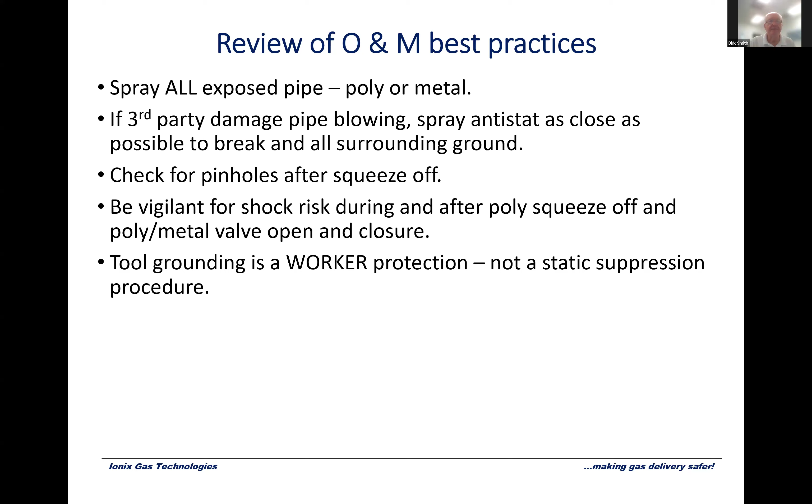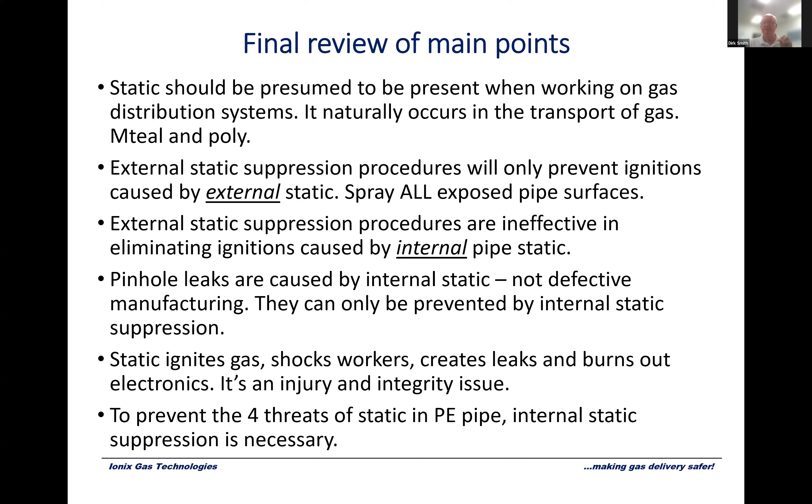It's static buildup in your service lines. You can't get rid of them unless you put internal static suppression in. Static ignites gases, it shocks workers, it creates leaks, it burns out electronics. If you deal with static, these 4 problems go away.